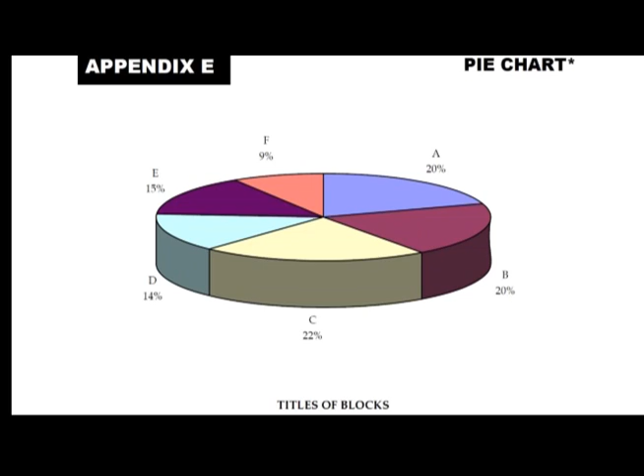If we look to Appendix E, we'll see a pie chart broken up into 6 sections, A through F. A is common occupational skills at 20%. B shows concrete at 20%. C, framing at 22%. Block D, exterior finish at 14%. Block E, interior finish at 15%. And Block F, renovations at 9%.

Essentially, what this relates to in the National Occupational Analysis is what they intend a carpenter to know to be Red Seal certified. So we break the trade up into these 6 sections, and the majority of the information one needs to know comes from framing at 22%, concrete at 20%, and so forth.

If we relate this to the Interprovincial Red Seal exam with 100 questions, we can determine that on framing there will be 22 questions, on concrete 20 questions, also for common occupational skills another 20 questions, and so forth. So this is very effective as a study guide for what the questions and sections the questions will actually come from.

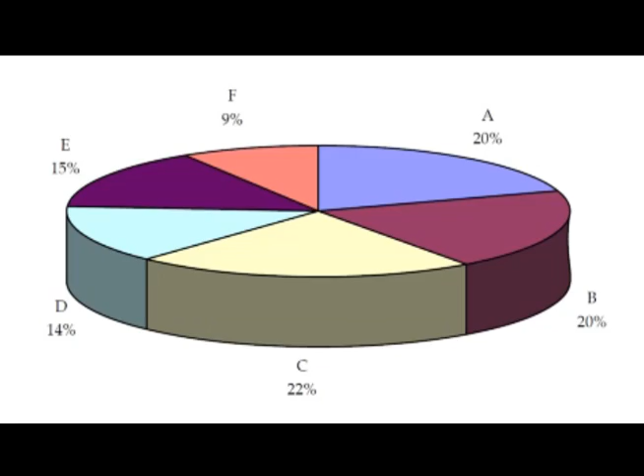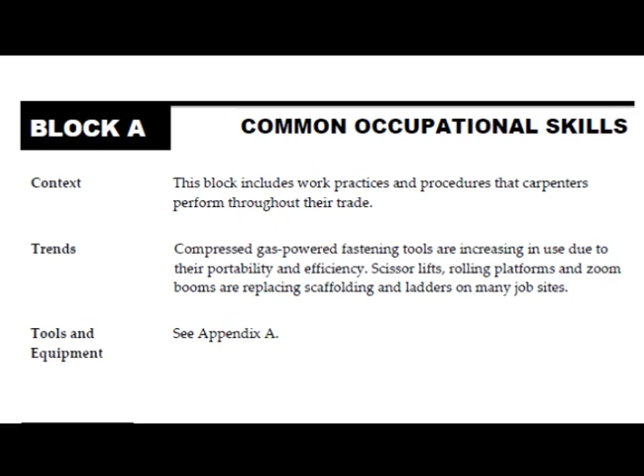Let's move ahead now and look in Block A, common occupational skills. As we mentioned before, there's going to be 20 questions come from this section under Block A. So let's go down and look at Task 1, uses tools and equipment.

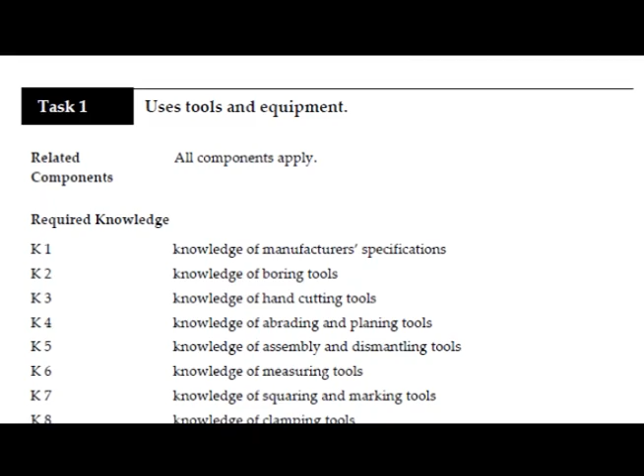Now we'll skip ahead here to K17 under required knowledge. Under K17, we'll see this as knowledge of types of rigging and hoisting equipment. K18, knowledge of components of rigging and hoisting equipment. K19, knowledge of hand signals for rigging and hoisting. Now take notice of how many times we're going to see references made to rigging and hoisting and hand signals. We see it mentioned 3 times right here.

Let's look down to where it says subtask, right at the bottom of the same page. A-1.01, uses hand tools. I just want to explain this reference here. It says NL yes, NS yes, PE yes. That means Newfoundland, this using hand tools is part of the Newfoundland Interprovincial exam, as it is in Nova Scotia, and as it is in PE, Prince Edward Island.

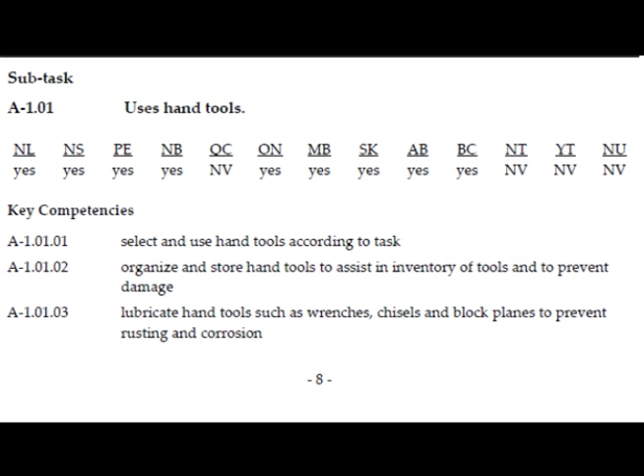Let's jump ahead here to A1.08 so I can show you a bit of a difference. Under subtask A-1.08, it says uses tack welding equipment, not common core. And we look under Newfoundland, it says yes. Under Nova Scotia, it says no. That means this body of knowledge, using tack welding equipment, is not part of a Red Seal exam in Nova Scotia. It's not something we accept as part of the carpentry trade, so for here it says no. So that's a piece of knowledge you don't need to know. You'll find that mentioned not a lot throughout the occupational analysis, but there'll be a couple sections where you'll see NS no. So just watch for that so you don't study any material you don't have to.

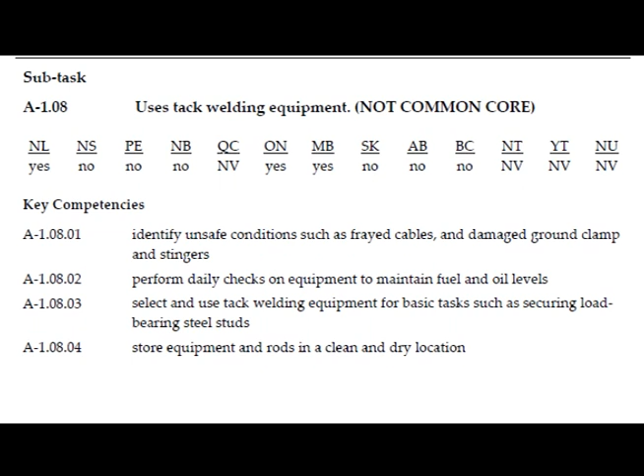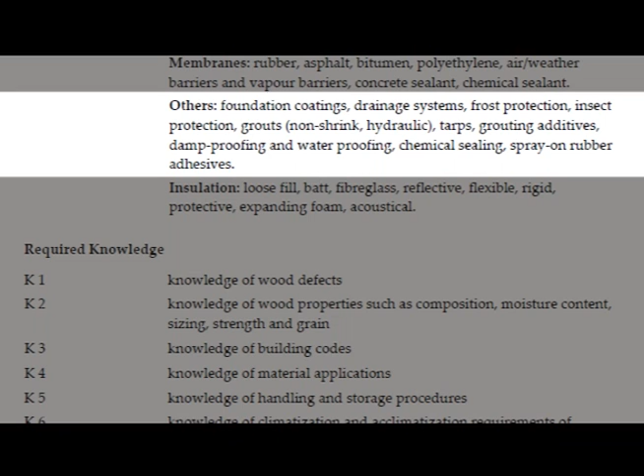Now let's move along to Task 2, uses building material, and right at the beginning, related components including but not limited to. Let's skip down to where it says others. It says foundation coatings, drainage systems, frost protection, insect protection, and it mentions here grouts, non-shrink and hydraulic, tarps, and grouting additives. Well, there we're seeing grouting mentioned a couple times. This has been a stumbling block for people in the past that have written the IP, but you notice here that grouts is mentioned a couple times. We'll watch for that again as we move along through our exploration here in this document.

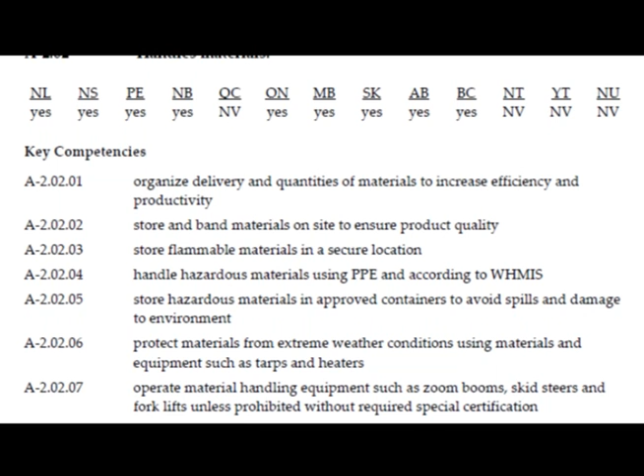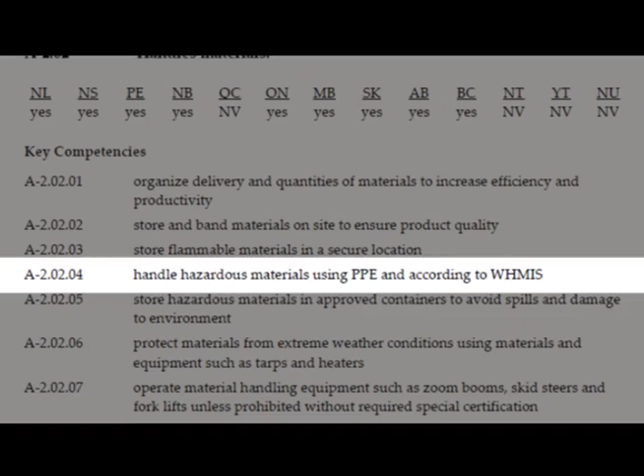Now let's go to A2.02.04, and this is under handles material. A2.02, handles materials, and we go down to A2.02.04, handle hazardous materials using PPE and according to the WHMIS. So we see a reference here made to WHMIS. Now let's move ahead a little further now, on to Task 3.

Interprets documentation. Right at the beginning under related components: National Building Code and referenced standards, blueprints, specifications, health and safety regulations, and again it says WHMIS documentation.

We see it mentioned again, as we do also under K7: knowledge of safety documentation such as MSDS, WHMIS symbols, and safety manuals. It tells you right there you're going to need to know the WHMIS symbols. It's spelled right out for you, so if you don't know them, you need to know them. It's starting to show you some areas you maybe need to brush up on if you don't already know it.

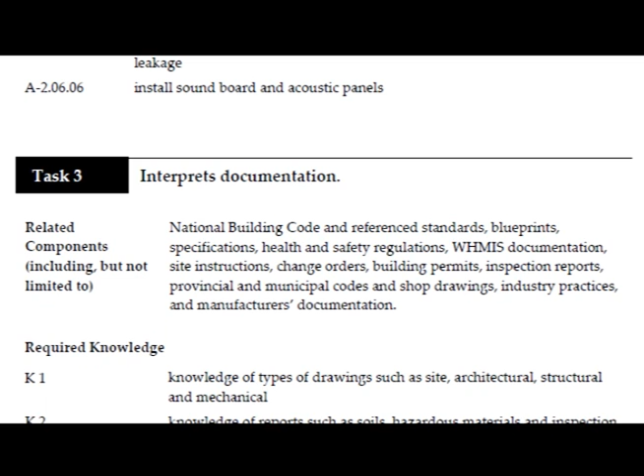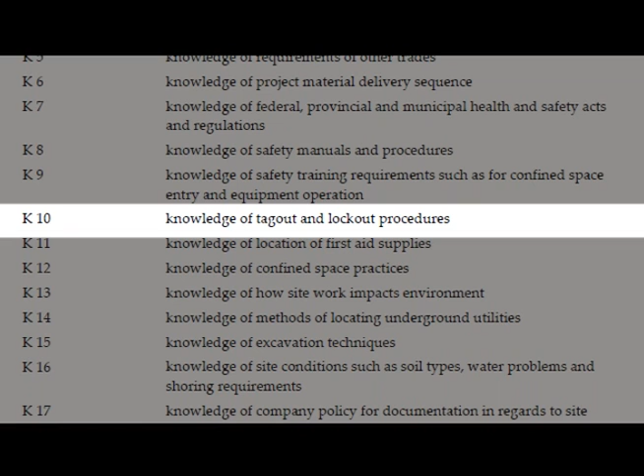Let's look ahead a little further now to Task 4, organizes work. We slip down to K10, knowledge of tagout and lockout procedures. Just a hint there that you should know about lockout and tagout if you don't. It's giving you a good indicator that's a piece of subject matter that could be on the exam.

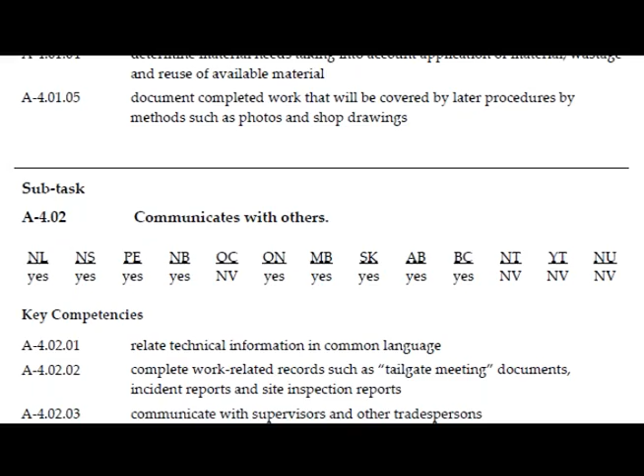Let's look ahead a little further, under subtask A4.02, communicates with others. We'll slip down to A4.02.07, uses recognized hand signals to communicate with crane operators. We see that again about rigging and crane operators, the hand signals.

We'll slip over now to subtask A4.04, maintain safe work environment, and go down to A4.04.07, apply WHMIS procedures such as record keeping of MSDS, product identification, handling, and disposal. Now we've seen WHMIS mentioned two or three times, maybe more, so it's a pretty good indicator that yes, there's going to be probably more than one question on WHMIS.

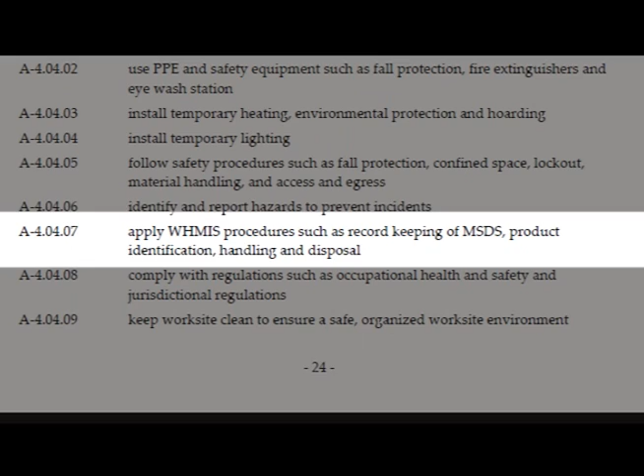Now we'll slip over a few more pages to Task 6, and in Task 6 it talks about builds and uses temporary access structures. Now this is where you start to see that perhaps you may not be familiar with some of the terms or some of the items, especially if you haven't worked in that sector of the industry.

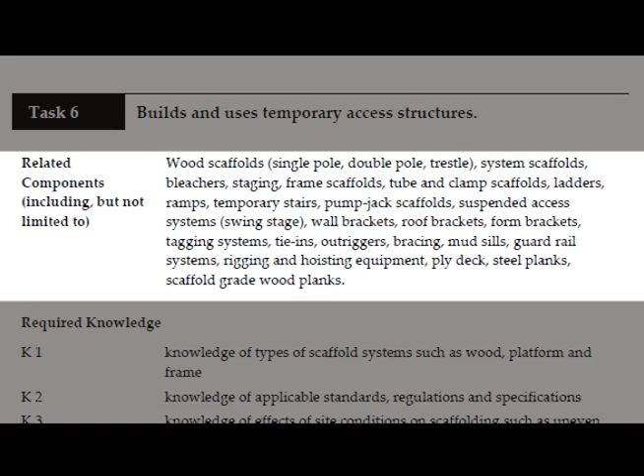It talks about wood scaffolds, bleachers and system scaffolds, staging, frame scaffolds, tube and clamp scaffolds, ladders, ramps, temporary stairs, pump jack scaffolds, suspended access systems such as swing stage, wall brackets, roof brackets, form brackets, and tagging systems. There's tagging systems for staging which you will need to know. We do provide some of that information in some of the resource documents we have, in a glossary that we provide. So if you don't know about tube and clamp scaffolds and bleachers, this is probably giving you a good indicator that you need to brush up in those areas.

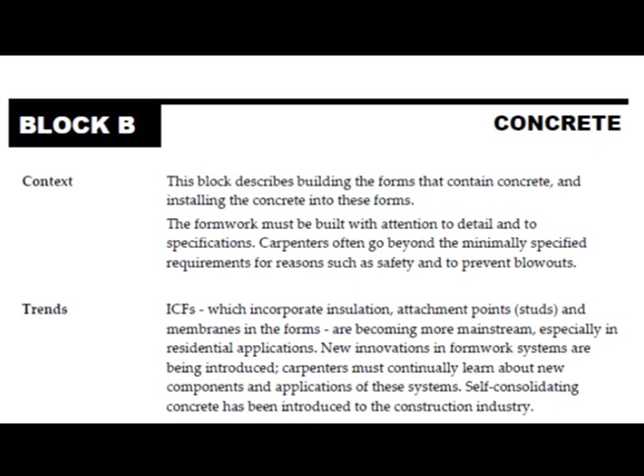Let's move ahead now to Block B, 20 questions on concrete. So we'll move ahead to Task 7, constructs formwork. We'll jump over to...

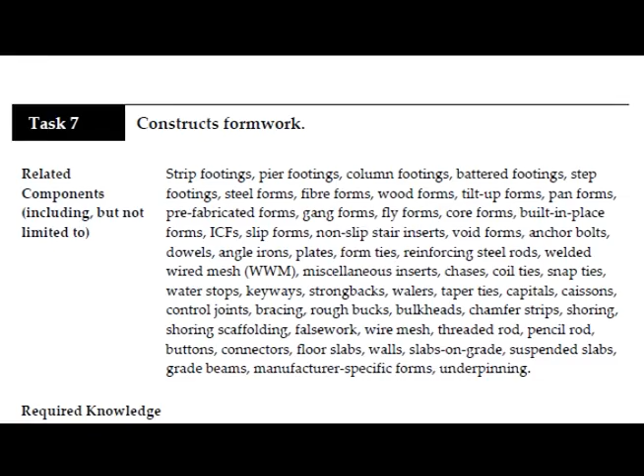K29, knowledge of grouting and epoxies. Here we see it mentioned again—I mentioned before that we've seen epoxies and grouting. And we go down to K31 again, knowledge of rigging equipment. So there we're seeing rigging again.

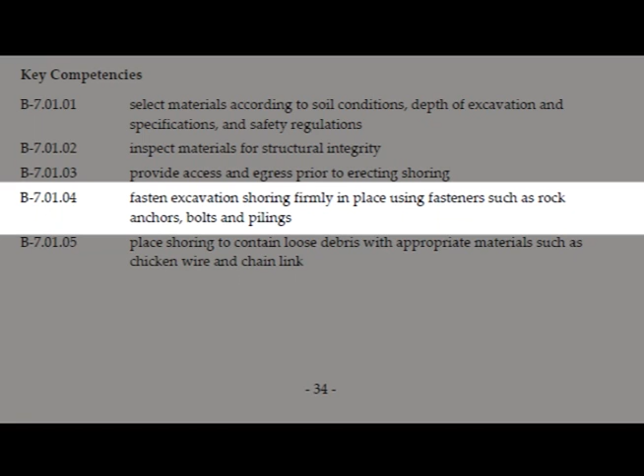Let's look down a little further to subtask B7.01, 7.01.04: fasten excavation shoring firmly in place using fasteners such as rock anchors, bolts, and pilings. Again, giving you some hints of some terms that you should need to know.

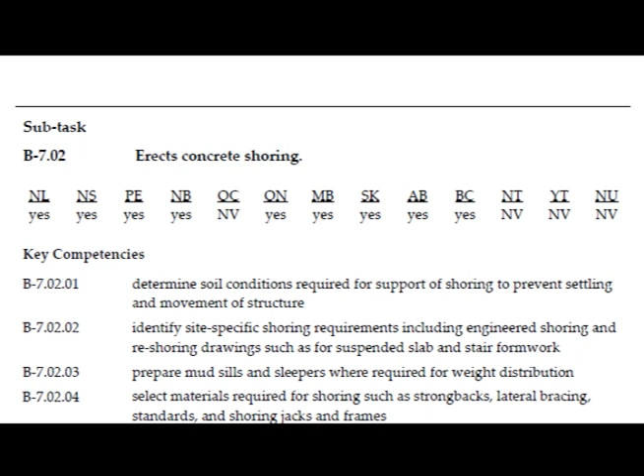Subtask 7.02, erects concrete shoring. Now we're starting to see shoring mentioned here a few times actually. We'll probably see it a few more as we go along. All right, let's move ahead here now to...

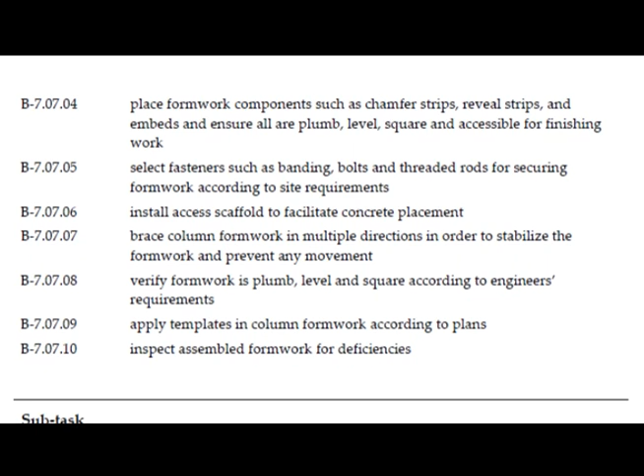7.07.06, and it talks about installing access scaffold to facilitate concrete placement. Another reference to scaffolding, so you know there's going to be a few questions on scaffolding, as it's mentioned throughout the document. Let's go ahead now to...

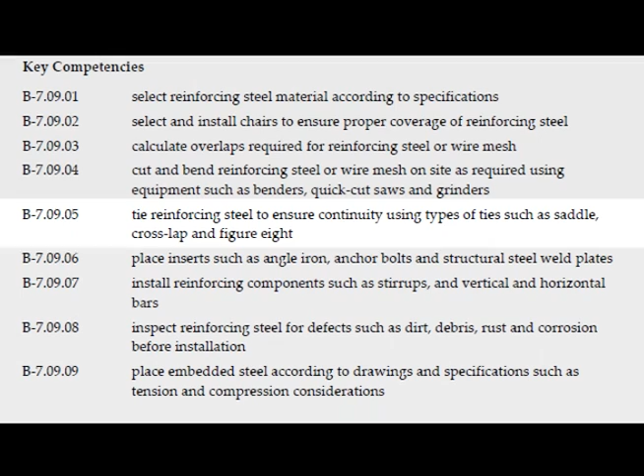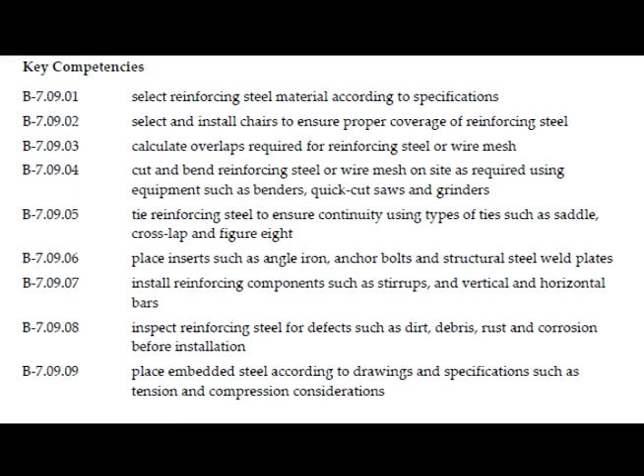B7.09, installs embedded steel. This has caught a few apprentices off guard before on exams. 7.09.05: tie reinforcing steel to ensure continuity using types of ties such as saddle, crosslap, and figure 8. So that's telling you there's a few rebar wire tie knots that you need to know for the IP exam, and they're actually spelled right out there for you. So if you don't know what they are, it's a pretty good idea that you probably should find out before your actual exam date.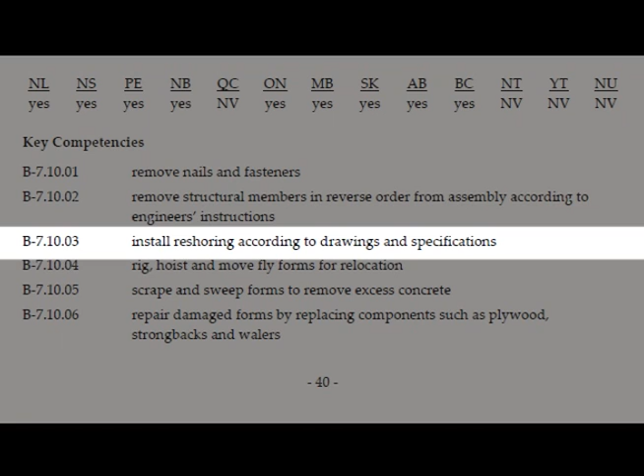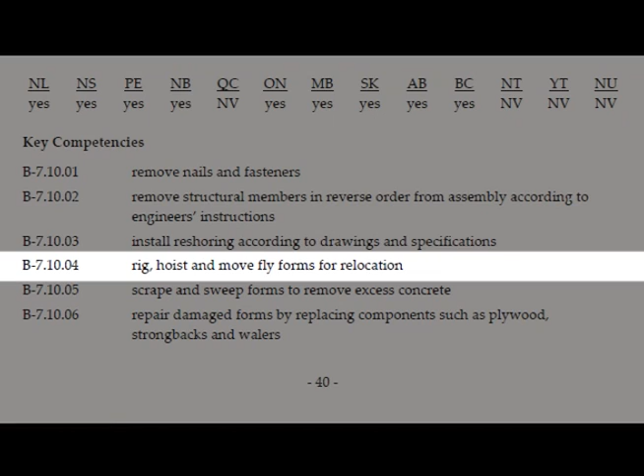Let's slip down to B710.03, which is under the dismantles and maintains formwork section. It says install reshoring according to drawings and specifications. So there's a mentioning of shoring again. And B710.04, rig, hoist, and move fly forms for relocation—another reference made to that crane operation of rigging and hand signals.

Let's head over to Task 8 now, installs concrete, cement-based, and epoxy products. We'll go down to K12, knowledge of crane hand signals and rigging points. We're seeing that over and over and over again.

K17, knowledge of types of grout, such as dry pack, expanding, and liquid grout—there we see grout mentioned again. And K18, knowledge of types of grouting procedures. So there's a pretty good indication there that there's going to be some grouting questions on the exam.

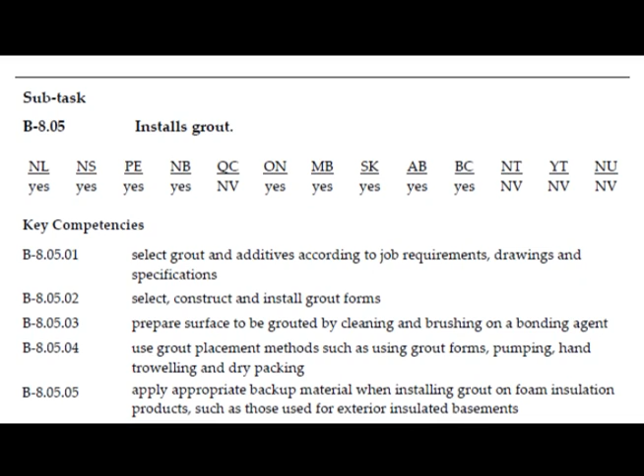All right, actually, if we go over to subtask B.8.05, there's actually a section there all into itself just on installing grout. So we can see that it's very important too.